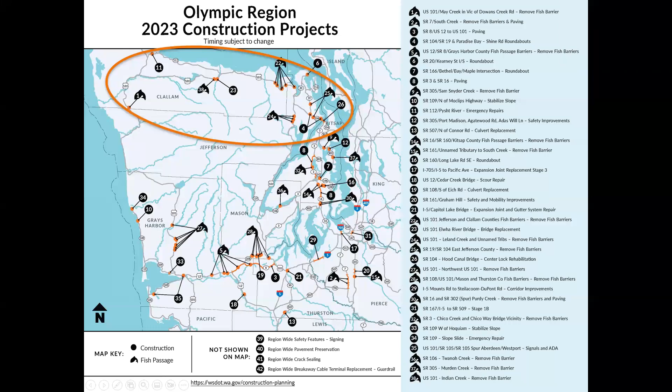Number 11 is the Pysht River Emergency Repair Project. Number 38 is just off the screen for me here—can you scroll down just a smidge? That's Indian Creek. Okay, so that's Indian Creek, and that one is just about finished up.

Number 23 is one of Ben's projects, the US 101 Elwha River Bridge that just kicked off—I'm sure you're familiar with that one. Fish passage icon number 22 is our US 101 Jefferson and Clallam County Fish Barrier projects.

Piper's going to talk about that one in detail in coming slides. Number 24 is the US 101 Leland Creek project, a remove fish barrier project that is in active construction right now. If you've recently traveled down 101 towards Quilcene, it's the project going on just a couple of miles north of Quilcene.

Circle number 4 is the SR 104-19 in Paradise Bay Shine Road Roundabouts project. That one actually got pushed back just a little bit. It does say 2023 construction here, and Ben's going to talk about it a bit in the coming slides, but it's not going to start until early '24 now.

Moving on to number 26, we have the Hood Canal Bridge Center Lock Rehabilitation Project. I'm going to talk about that one in more detail in the coming slides, and discuss some of the upcoming closures. Number 25 is our East Jefferson County Remove Fish Barrier Project, involving Shine and Swansonville Creeks. And the last one shown in the orange circled area is number 6, our SR20 Kearney Street roundabout, which will be starting shortly.

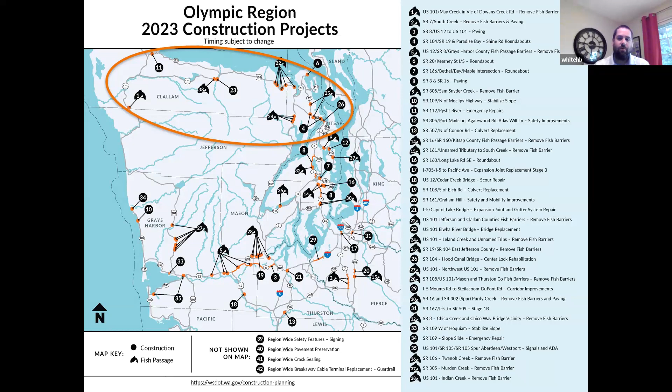So just a big overview of the map of all the projects we have going on. As you can see, lots of stuff happening in 2023. We're trying to keep folks as well informed as we possibly can, knowing that we have lots of construction coming up. If we transition to the next slide, we'll move into 2024.

Okay, so this is 2023 specific construction up in your area that I wanted to focus on. It's kind of the projects that I already went through, with a few added here that weren't on the list. If you look at number 11, shown in the black square, those are our maintenance and preservation projects. On top of all the stuff I already discussed, we also have a significant amount of maintenance and preservation work happening at the same time.

As you can see here, similar to the last page, the fish icons designate the fish passage only projects, whereas the circular icons represent any of our other style projects. It might be a bridge repair, a scour repair, a roundabout project, a variety of different projects going on.

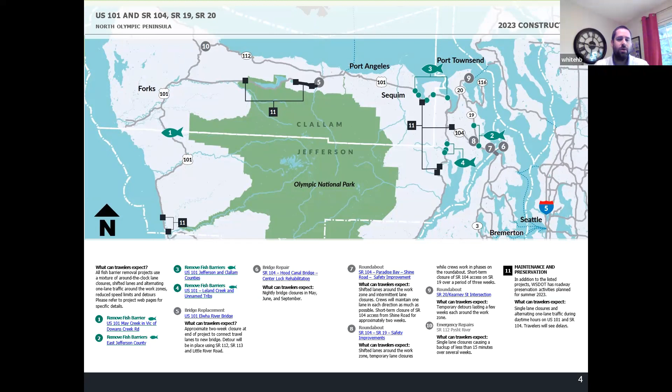Oh, sorry about that. No, go ahead. No, I think that was an error, I put that person on mute.

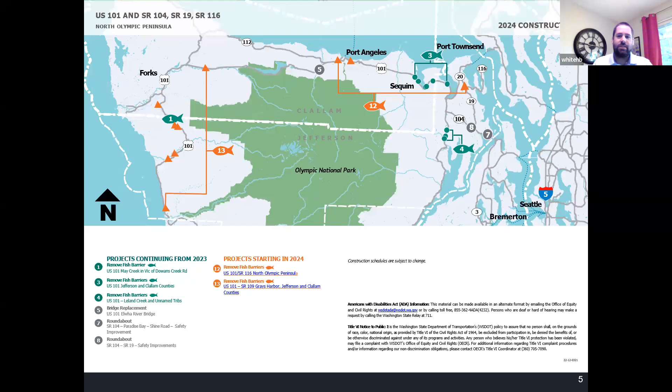We're good. Okay, all right, so jumping into this slide, this is now our 2024 construction season up in your area. You'll notice you're seeing a lot of the same icons on this sheet as on the 2023 page. The reason is a fair number of these projects are multi-season projects, so construction will go through 2024 before we get them 100% complete. You'll also notice projects shown in orange on this sheet, and those are the new projects starting in 2024.

The first one I want to speak to is number 12, fish passage icon number 12, our US 101 SR 116 North Olympic Peninsula project. Piper's going to talk about that one in more detail in the coming slides. Also number 13, the US 101 SR 109 Grays Harbor, Jefferson, and Clallam County Fish Passage Project, also called the Coastal 29 project — the 29 bundle fish passage project beginning in 24. We have a separate slide on that, which we'll cover in the coming slides. So this is just meant to be a general overview showing 2023, 2024, kind of what we have coming up in your area, and then we'll get into more detail.

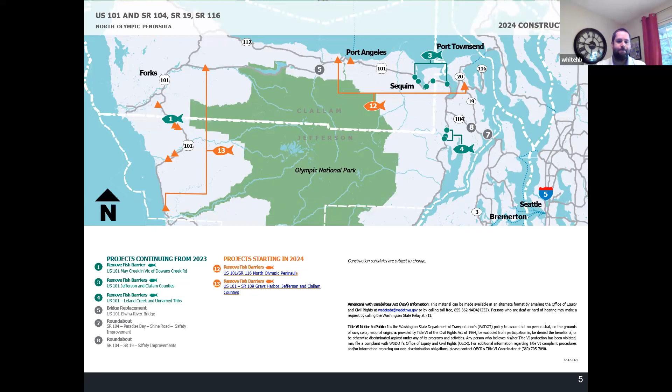Go ahead and jump to the next slide, please. All right, so focusing on Hood Canal Bridge specifically, we have a couple of big exciting projects coming up. The first one I want to speak to is a great project in that we're making significant repairs to the bridge, and at the same time I don't think traffic is going to feel any pain from this project at all, because it's requiring next to no lane closures as a result.

That project has actually been going on now for about a month or two, and there has been no impacts to traffic so far as a result of the hatches project.

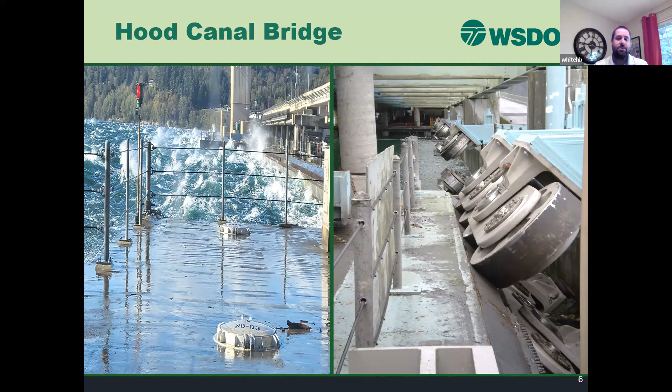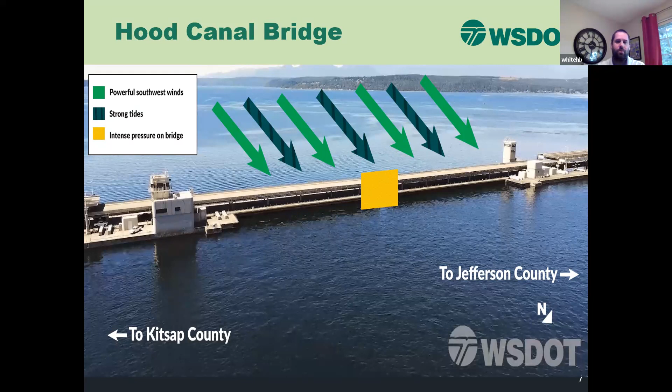Go ahead and jump to the next slide. Thank you. All right, so who's doing the work? What company got the contract to do the work on the bridge? For the center lock portion of the bridge, it is Masonic Construction.

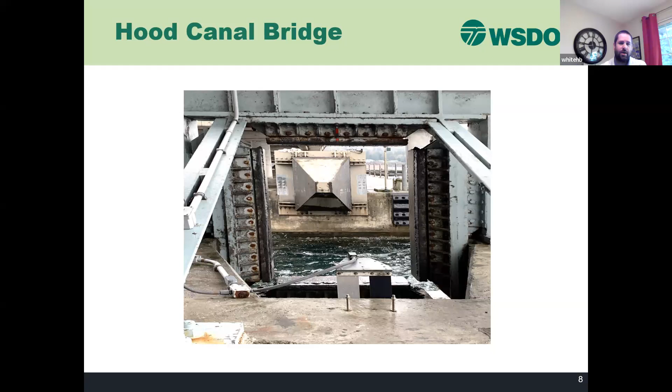We jump to the next slide. I believe this is where Ben's going to take over, and he's going to talk about some of the more specific projects that are going on up in the PA area that I already covered. All right, yeah, thank you, Brian.

So this is the Elwha River Bridge project. As many of you know in the area, this kicked off in April of 2023, so we just started getting under construction. People in the area know that the bridge is old. This is a nearly 100-year-old structure, originally constructed in 1926. So it's at its lifespan, it's served its purpose, and we're out here making these improvements to provide a new bridge structure.

The significant improvement this project will make is that if you're coming down the hill on 101 heading westbound, currently we have a tight 25-mile-an-hour turn at that area. The new bridge alignment will allow for a faster design speed through there, so we'll be at a 35-mile-an-hour design speed. This will allow faster travel down the hill, and for traffic going up the hill heading eastbound, it will allow them to carry a little bit more momentum going up.

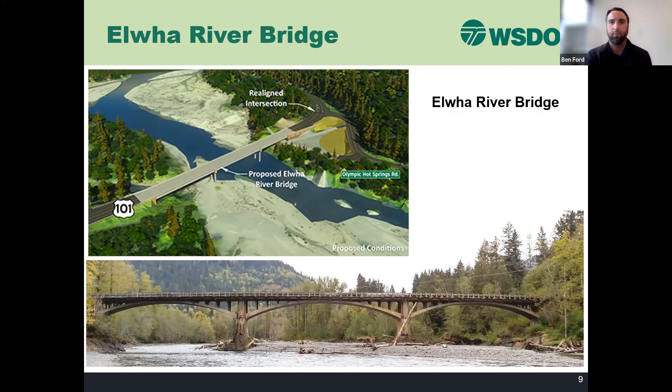All right, so this is 2 roundabout projects on SR 104. These are just to the west of the Hood Canal Bridge. One is located at SR 19 and SR 104. The other is at the Paradise Bay Road intersection just on the west side of the Hood Canal Bridge.

Again, these were supposed to be constructed this year, but we did have some delays in that project. So construction will begin spring of 2024 and run through fall of 2024. For these projects, there's not major roadway closures at SR 104 to be anticipated. It will just be your typical lane shifts, reduced speed limit, and temporary lane closures, one lane alternating traffic through the work zones for these projects.

The background behind these 2 projects, these are safety improvement projects. These intersections have been identified as high fatality, high serious injury intersections. So that's the purpose of putting in the roundabouts, to help reduce high fatality accidents, and hopefully those are all reduced.

So Ben, what will the speed limit be once going through the roundabout, once it's completed on the one at the intersection at Paradise Bay Road?

So on roundabout design, the purpose of the roundabout is to slow down traffic. Technically your speed limit isn't reduced, but you have to go into the roundabout, and the design speeds, I think, were wanting to get traffic down into very low speeds. Don't quote me on the exact design speed, but I'm thinking 10 to 15 miles an hour is a typical design speed through a roundabout.

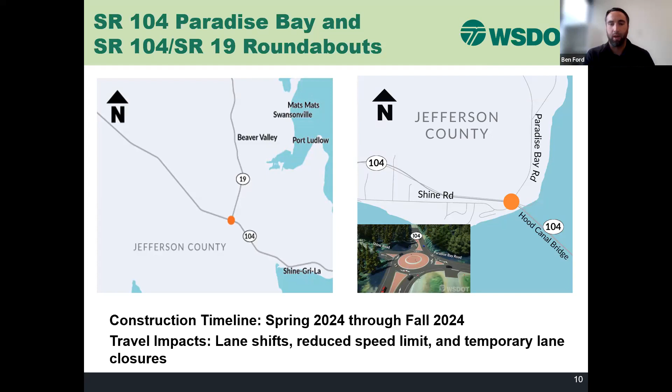Great, thanks. I can add to that a little bit, and I'm sure Mark can too, but specific to the Hood Canal Bridge closures, we've been in constant communication with fire and EMS, letting them know exactly what times we're planning to have the bridge closed, because it's a significant impact on them. If they need to get someone across the bridge and it's closed for 4 hours while the contractor has something like a pier removed, we need to make sure we're coordinating with EMS and fire to let them know exactly the closure times.

Mark's team in communications does a great job staying in contact with those folks as much as possible. It's important to remember this is construction—things change. Every once in a while it takes the contractor an extra hour, or we have to close the bridge an extra half hour, or maybe close it a half hour early. Anytime we know those things, we try to get that information out to the community, the public, and to EMS and fire as fast as possible so they can do their planning ahead. It's a coordinated effort between us and EMS and fire to make sure emergency services know exactly our plans, especially for the major closures coming up.

Ben spoke to it really well. When we're in alternating one-lane configurations on any of these construction contracts, our contractors are familiar with those situations and know how to get ambulances through in a timely manner. Like Ben said, they'll open the paddle for one side if they know an ambulance is coming, let them through, and flush right through. Specific to the construction sites, I think it's handled really well. We're really trying to do our best for a coordinated effort with fire and EMS for our major closures coming up, giving as much advance notice as possible so they can do their planning too.

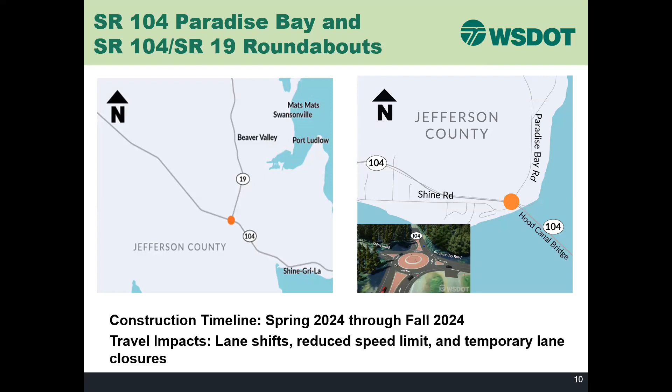Mark, anything to add? I know you've been doing a lot of outreach with EMS and fire on the Hood Canal Bridge. Yeah, I can give a specific example. When we were working on Indian Creek, putting girders on the bridge during the daytime, the contractor had folks out there with radios and scanners, because once a girder was in the air, it had to go in—there was no stopping it at that point. So they had people monitoring, making sure nobody was coming before they put that girder in the air, because once it did, they couldn't open the roadway for 10 to 15 minutes at a time. The people on the ground are generally very cognizant of that as well.

I know OMC and none of the hospitals on the Olympic Peninsula have the ability to deal with certain types of heart issues. So it's Olympic Ambulance that transports people, not EMS, I don't think. That happens regularly. If someone needs angioplasty or that kind of thing, they have to go over to Kitsap County for those types of services.

Yep, Colleen, I was using EMS as a general term. So yes, I agree with you. Sorry about that. Got it, okay, cool, thanks. Maybe they are included in that, I just wanted to make sure.

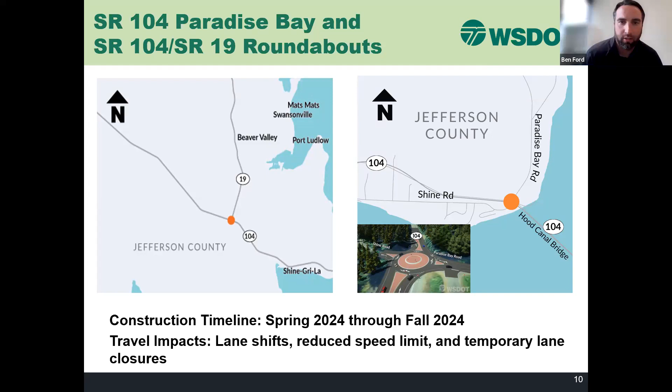Earlier we heard Brian talk about the fish passage program, and we saw the little fish icons splattered all over the screen on the Olympic Peninsula. So what is the fish passage program? Why are we out here?

Culverts were first installed with the intent to move water from one side of the roadway without any consideration of fish passage. It was just, we have water building up on one side, a stream, let's put a culvert in, get it to the other side. Our roadways will stay intact, and we'll be conveying water from one side to the other purely for hydraulic purposes. We didn't really see the impacts to the environment that those had.

Correcting fish passage barriers is an important part of the state's efforts to protect and restore fish runs negatively affected by culverts on our state highways.

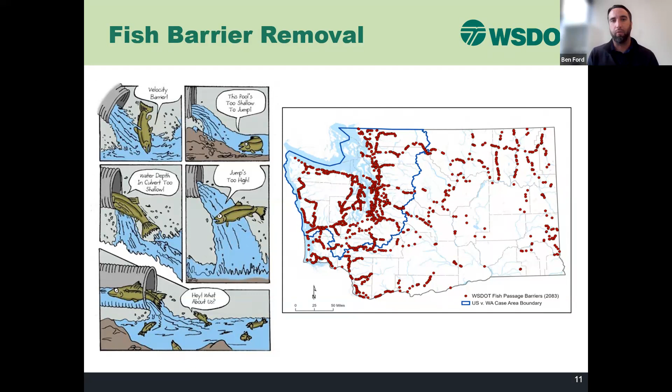This definitely isn't just an isolated state thing. You see counties and cities also correcting these fish barriers, even though they're not part of the injunction. So there was a question earlier, before Colleen, about how do we pick these fish passages. The injunction requires us to correct and restore 90% of habitat by 2030.

So that's everything we're looking at. When you remove a barrier, we look at how much habitat we've gotten back by removing that barrier, everything upstream of it, from the headwaters down to that barrier. That's how we are looking at our projects and getting those.

So how do we reach our goals and prioritize projects? First off, we have a lot of these to do.

So we look at the delivery method. Conventionally it would be a bid build, where we design the project and then put it out to bid. The contractor bids it, low bid wins, and then they go build the project as we designed it.

There are also two other methods, design build and progressive design build. That varies from the bid build, where we give the contractor just a concept, or maybe no concept, and they come up with a lot of the ideas and their own designs themselves. That gives them the ability to come up with better ideas, gets more minds in the room looking at things, and comes up with better solutions.

Also, as I said, we're looking at habitat gain. We're looking at projects that provide us the most benefit by opening those up. So if one barrier is going to give us 50 miles of habitat gain and the other one's going to give us half a mile, we're going to do the 50-mile habitat barrier first.

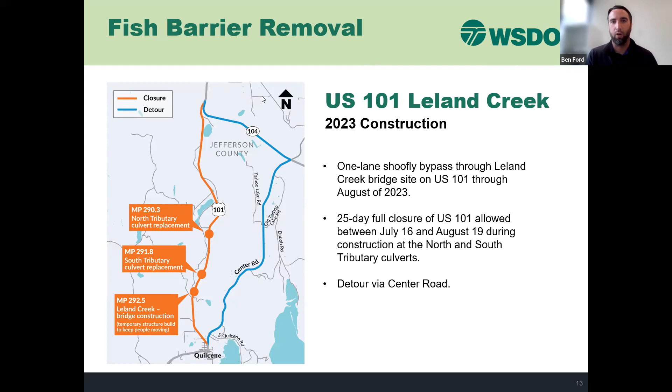Once we get into those 2 projects, we're allowing the contractor to close US 101 between July 16th and August 19th for up to 25 days. Those final dates aren't established, but it will be within that window, and we should know 30 days in advance when that actual 25-day full closure will be. During that time, traffic will be detoured on Center Road from Quilcene up to 104 and then back onto 101 — that's the blue line shown on the screen.

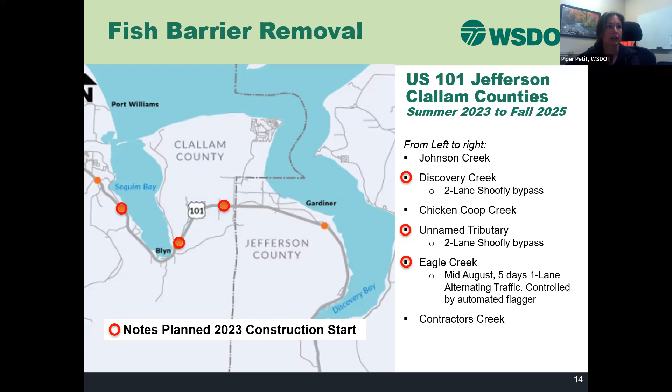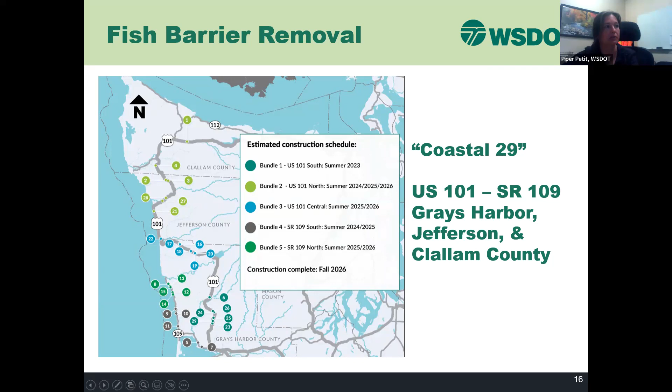The following bundle, number 2, has 2 sites in Clallam County, so construction may start to impact closer to home. Given those projects are a couple years out, we don't have details on those designs yet, but for bundle number 1 going off this summer, that one traffic-wise will involve some 1-lane shooflies with alternating traffic down south on US 101.

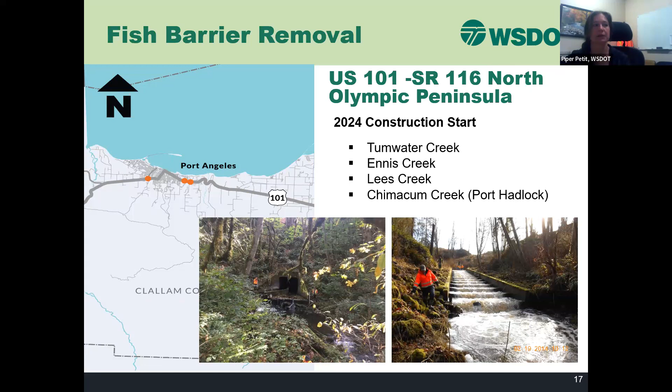So I think that's all we have to share in terms of our projects. We do have a couple slides here to show you how you can stay informed. Did you want to present these? Yeah, happy to. Thank you.